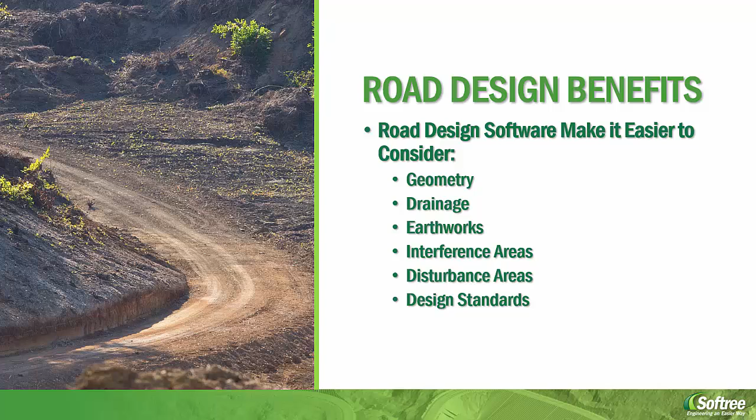These are some superficial benefits, but those superficial benefits have more significant overarching benefits for your operation. Those benefits lead to reducing your uncertainty in your plan, reducing indecisiveness in your planners, so improving or reducing planning time. Also making sure that the actual best solution is the one that's pursued, and reducing indecisiveness amongst your builders, so they have a plan in front of them when they're building the road. They know what it should look like when it's done.

Other big benefits: improve your road's safety and reliability. Referring back to incorporating design standards, from a safety standpoint, you can use design standards to improve things like curve design. So if you have a corner in your road, specify the specs for the corner so it matches your design speed, and people aren't traveling down the road elsewhere at 80 kilometers an hour and think they can take the turn and go off the road because of it.

Building upon that as well, also from the reliability standpoint, even if it's not necessarily for the safety of the road's geometry, you can incorporate more consideration into how you can improve the road's reliability. Maybe it's not a new road, but you're upgrading an existing road from a seasonal road to an all-season road, and you can incorporate your road prism design in that and get something that'll work and have a good idea what that's going to cost you, and how much effort's required to build it.

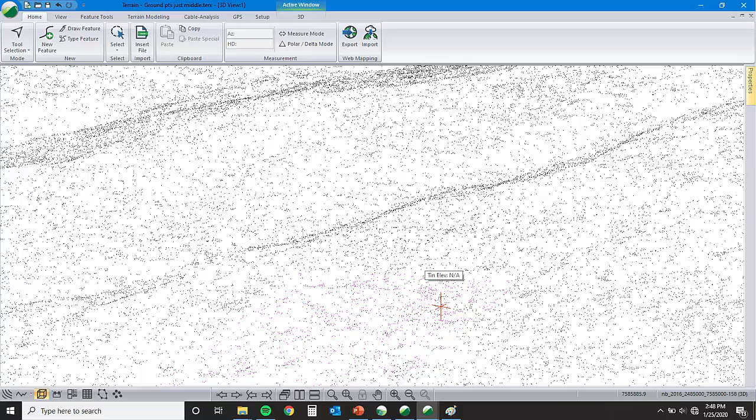Our software works by comparing two surfaces. The first surface is our topo surface, the second is our roadway. We can use a variety of different data types, including total station data, hand traverse data, really anything else. This example is point cloud data from a LiDAR. We have all the points in there, including vegetation and buildings, so we strip those out to leave just the bare earth points. We take those ground points and turn them into a TIN, and that TIN becomes our digital surface for topography.

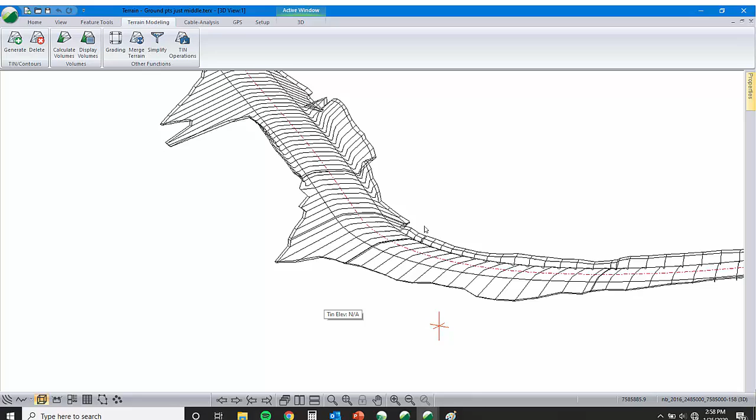How those two surfaces interact is what the planners find useful. Here we can see we've got some cut and some fill, so before ever putting equipment on site, we can adjust the alignment so that cut balances the fill volume and you're not hauling material into site.

You can also look at things like crossing geometry. Here I could drop a pipe in the design in a matter of seconds and figure out exactly how long that pipe needs to be to daylight from its inlet to the outlet, the fill slope, and adjust skew, etc. This really improves the plan and gives you an idea of what's going to happen before you ever put a person on site. We've also got some curvature, a vertical curve and a horizontal curve, and those curves follow the design standard, so this road is going to be safe.

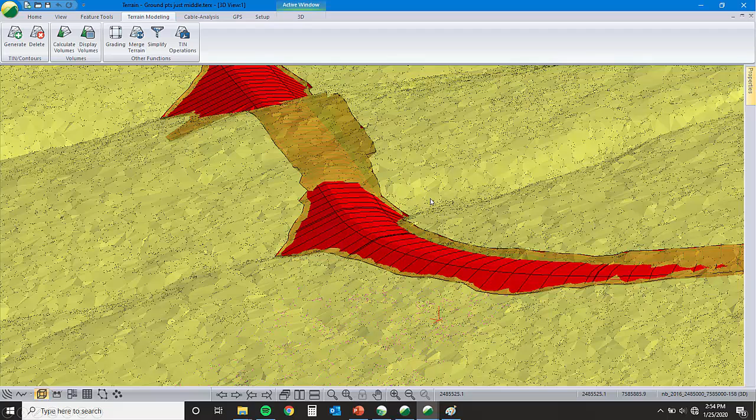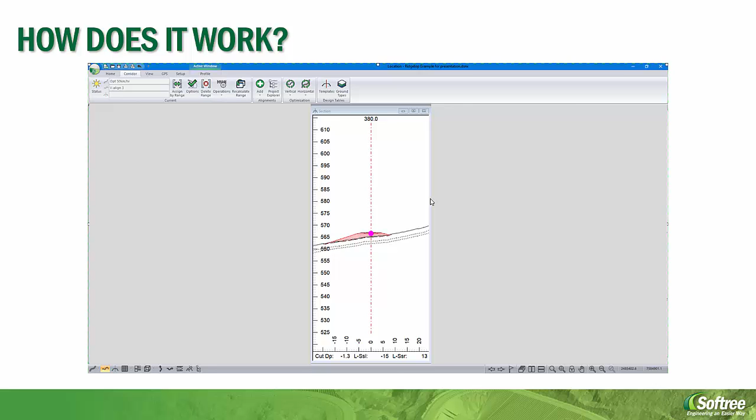So how does it all work? That 3D view, you can use when designing if you'd like, but most folks predominantly rely on three windows. We've got our cross-section geometry, where we define the geometry of a road cross-section. It's very straightforward to set up, using a cross-section template that's basically a fillable form where you can adjust the dimensions and capture whatever you want for roadway geometry. There's some smarts built in, so it'll figure out what fill slopes to use based on material at the site, and what cut slopes to use, extending those down to the ground.

You can include things like stripping and whatnot. That's cross-section geometry. Then we have the alignment, which is a 3D alignment, but it's usually best to consider it as two separate views: our plan view being the horizontal alignment, and the profile view being the vertical alignment. We can adjust all of these, and since it's 3D software, if I move my plan view around, my cross-section updates to show the appropriate ground underneath it, and the profile updates as well, and vice versa. Everything updates in real time, and it'll also track things like volumes and material movements for you.

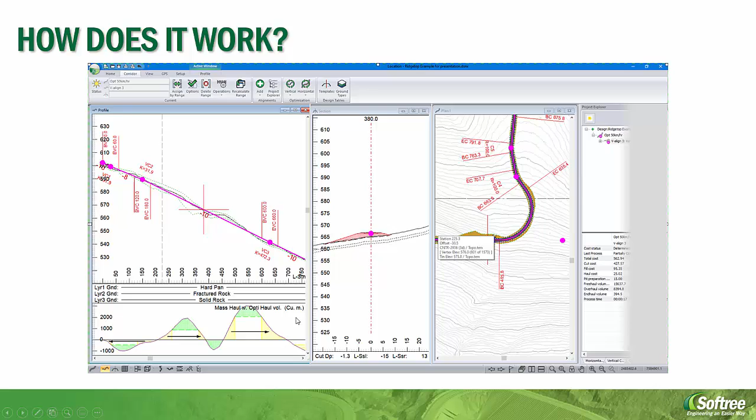Having all that in front of you and making it easy to adjust ultimately lets your planners make better decisions. They can explore different options and really easily see, okay, I should put this here because if I put it over there, that's going to move more volume, it's going to interfere with that creek, and we're going to need another cross drain, etc.

Then we can look at the details to reduce uncertainty. For that crossing example where we had that big fill, the planner or designer can place a digital culvert in there and say, okay, that culvert should be this long. Now when you go to order your culverts, you can avoid under or overestimating material requirements. You can order what's required so you don't end up with an excessive contingency in ordering too much material, or even worse, not ordering enough and slowing down production and operations.

The last point is reducing indecisiveness. Putting all that information in front of the person is useful so they don't end up humming and hawing and exploring different options without ever really knowing which way they should go, bouncing back and forth. It also reduces indecisiveness for your builder — if you give them a formatted design drawing, they know exactly what the expectations are for that road to look like when they build it.

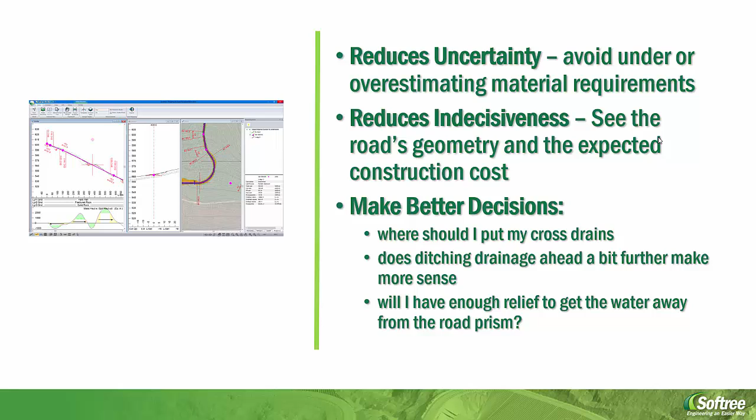Part of making better decisions and reducing indecisiveness, or reducing uncertainty, stems from the improvements in estimating. Oftentimes, without using any kind of design software, road construction is viewed as being a qualitative process, so things are either difficult, normal, easy, etc.

That is problematic in a lot of cases. If you're communicating with other planners and you say it's going to be easy to build a road through here, and their 'easy' is different than your 'easy', schedules get mixed up.

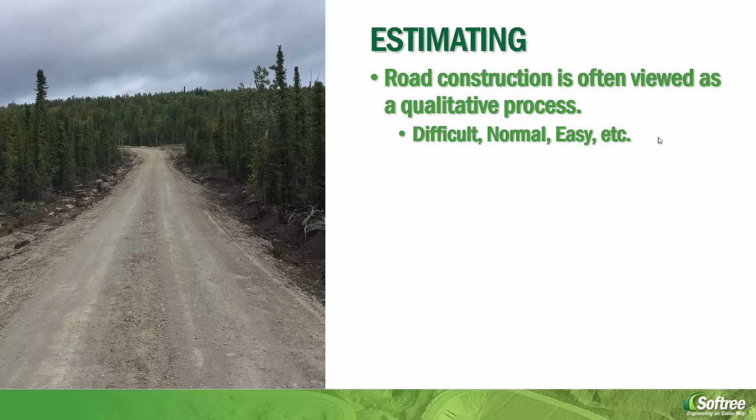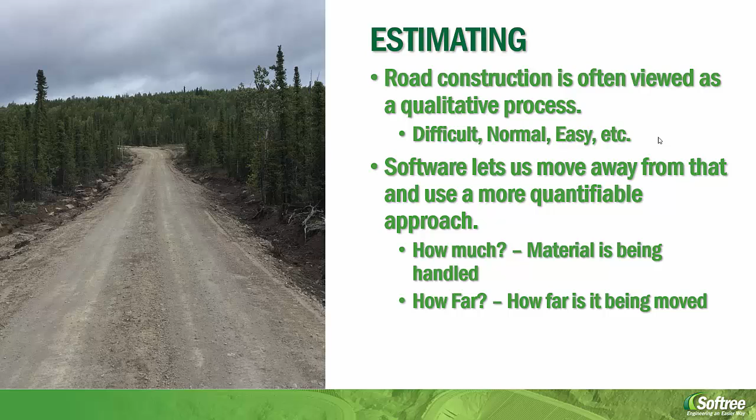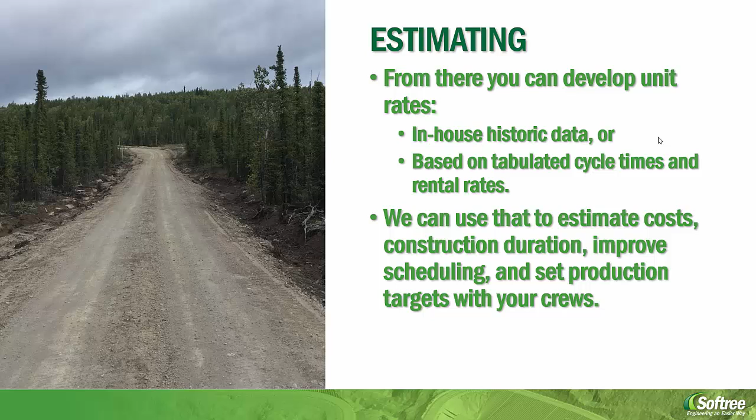The software lets you move away from that and use a much more quantifiable approach. The drivers for road construction costs are how much material is being handled and how far it's being moved. From that, if you come up with some unit rates, using in-house data or tabulated cycle times and equipment rental rates, you can really nail down things like cost estimates, scheduling, figuring out construction duration, and also setting production targets for your builders to shoot for.

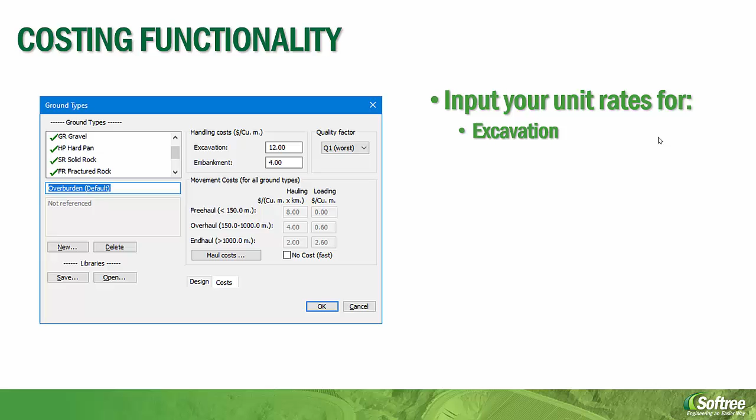Cost estimates can be fairly tedious if you're doing them by hand, and the practicality of exploring every option with a full cost estimate as you move around and adjust your alignments isn't that practical. So we've built it into the software so the user can define their handling costs: how much it's going to cost to excavate a given material per unit volume, how much it's going to cost to place that material, and how much it's going to cost to move that material. From there, the software will continually update your expected costs and put that information right in front of the planner so they can make better decisions.

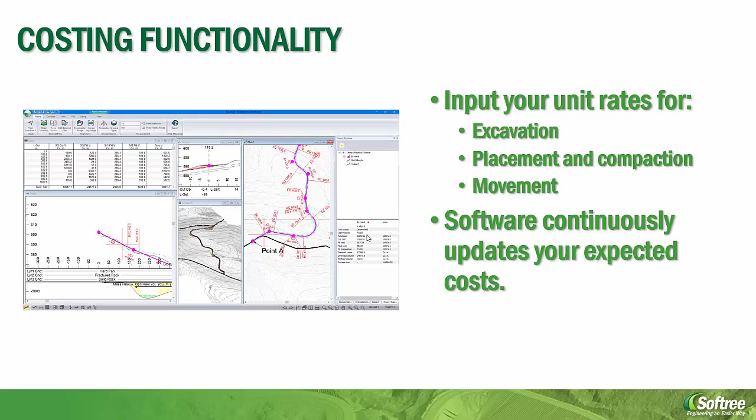Now, a newer feature that I find really interesting, though I won't go into too much detail, is the optimization side of the software. Now that we have the road construction process defined in quantifiable terms, and we've defined the relationship for what drives the costs, the folks at Softree have created an optimization side to their software. This takes the road design process and turns it into a semi-automated one.

The user can define their design constraints, like curvature requirements for design speed, locations where you need overlanding, and minimum fill depth. You can define all those things, then click a few buttons and the computer is going to adjust the alignment to minimize construction costs while adhering to those constraints.

It's a pretty significant advancement in the technology side of road design, and it's very cool.

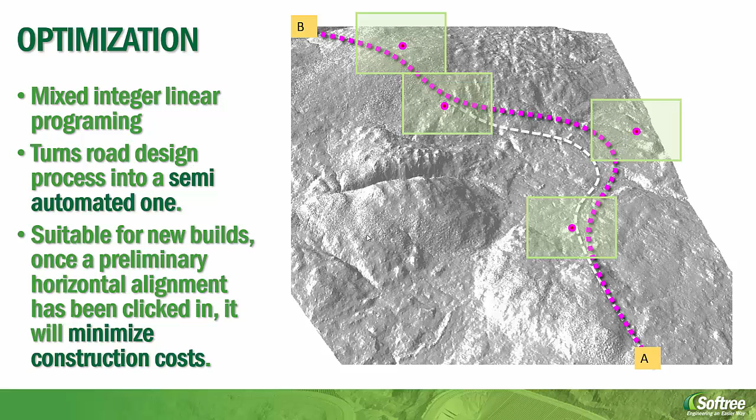We've covered the engineering technical side of things, but having an excellent plan without being able to communicate that plan to those who have to implement it is useless. So to get around that, we have some great output options.

For digital exports, we cover things like exporting LandXML. So if you're doing detailed construction staking with survey equipment, or if you have GPS machine-controlled equipment, you can give them a LandXML file and build your road right from that. Other common formats are shape files, which we can export, and also Avenza. So if you want to produce a georeferenced design, you can, and use that with the GPS.

For a more traditional approach, we have pre-formatted workbooks that you can set up and customize to show whatever you want, whether it's cross-section view, plan view, profile view, data tables, etc. You can tweak the format so it looks exactly the way you want, and share that amongst multiple designs. As you're designing, you get to the point where you're content with the technical side, and then it's time to plot the design. With a few clicks, you can populate one of these pre-formatted workbooks and have a finished product ready to send to your builders.

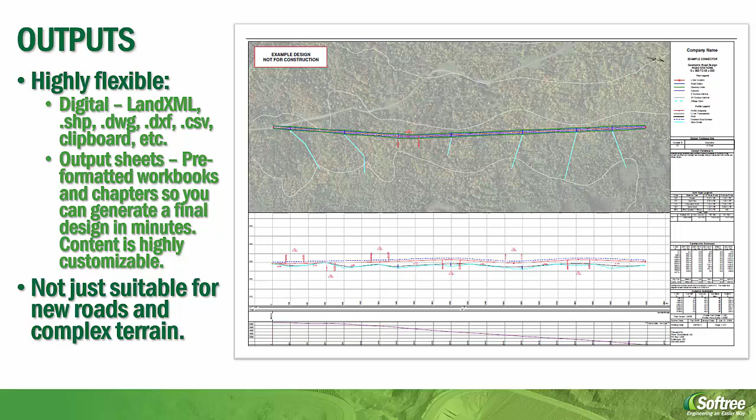I think our software has the potential to really help your operations. So if you're building roads or upgrading roads, I think we're a great choice. Using the software is going to offer benefits such as geometry improvements, reducing your costs, improving your documentation, and improving the confidence you have in your plan. A full design with RoadEng is very quick and easy. We do pride ourselves on that, touting ourselves as the easiest engineering software you'll use, and I really believe that. Lastly, you can make the road design process as simple or as complex as you want. It's really up to you how detailed you make these things.